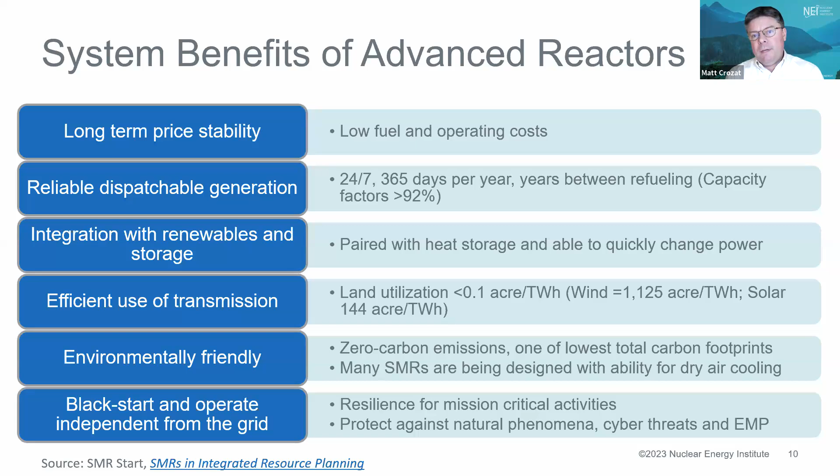What's behind this? Well, I'm not going to go through all the points on this slide, but what we really want to focus on are the second and third ones here, which is the ability to pair a 24/7, round-the-clock generation asset that is carbon-free alongside wind and solar that are being deployed at large scale. We continue to expect an increasing drive towards low carbon solutions, but nuclear works really well as a complement to provide steady power alongside intermittent resources that have been expanding widely and will continue to do so.

This is happening with the backdrop of a lot of political support across the aisle. By way of full disclosure, I'll point out I made these slides a number of weeks ago, and the politics have been evolving since. But the overall themes here from the Biden administration, Republican Congress, even the chairman of the Senate Energy Committee, have been very strong support for nuclear across all of these political constituencies. And this has actually driven to a manifestation in some pretty significant policy developments over the last 2 years that have really reshaped how nuclear could fit in the portfolio.

Going back to 2021, we had the bipartisan infrastructure law, the Infrastructure Investment and Jobs Act. This was passed on a bipartisan basis, as I said. It included 3 big policies for nuclear. One was funding to ensure that plants that were facing the economic pressures to close would have funding to continue operations. That funding has been central in seeing the decision to reverse the planned closure of Diablo Canyon in California, for example. We also saw funding for the demonstration of advanced nuclear technologies, which had been previously identified, but now actually have the money to go with the government cost share. And I'll get into more of that later.

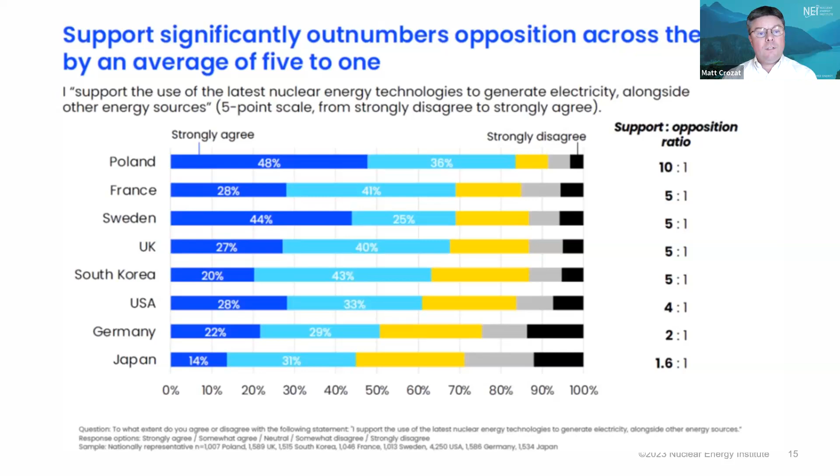First, what we begin to see is as we ask people on a 5-point scale how they look at nuclear, the answer is positively. I think in some cases surprisingly so. We begin to see, even in countries that have been more reticent towards nuclear in recent years, support, at least modestly so, for a continuing role of advanced nuclear. And in some cases, we've seen extremely strong support for nuclear. If we take that same kind of question and push people off of a 5-point scale and simply ask them, should nuclear be part of the future or not? The answer is yes. We see strong support for nuclear as a policy choice for moving forward technologically.

Even when we begin to narrow the question for those who claim an affiliation with an environmental organization, we see support for nuclear across countries. Moving past the point, especially in the United States and Europe, where nuclear was being seen as the primary focus for environmental activism, that's been softening for a number of years now. And we're really seeing it in the data. I'll come back to that too.

One of the places we have seen a gender gap is around support for nuclear. Upon further investigation, though, what we're finding is this gender difference in how nuclear is being perceived is less about a rejection of the technology and more about an uncertainty. There is an opportunity for engagement and conversation to bridge this previously established gap that we have seen. Some of the data that is not included here shows that just creating a conversation around some of the attributes of nuclear goes a long way, even in just the brief context of an interview, of moving some of these attitudes, which is something that's encouraging as well.

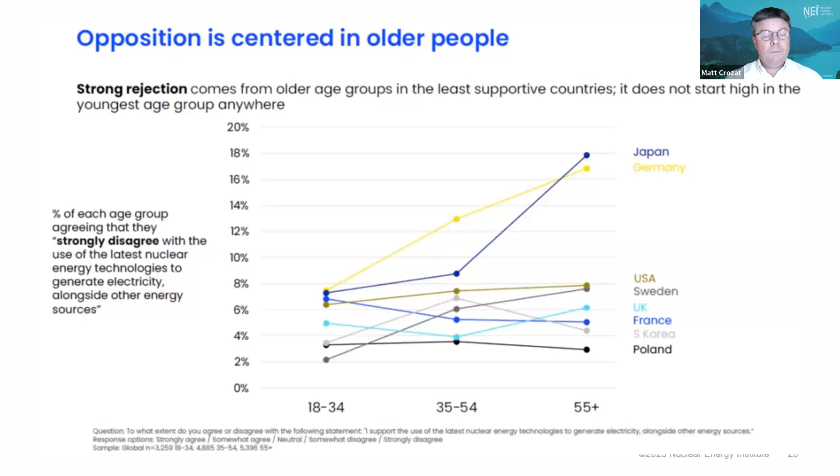But to put it clearly, climate change is a bigger concern than anti-nuclear activism assumed 30 or 40 years ago. And we are seeing this in not just the survey data, but in the kinds of conversations that we're having and the sort of political support that we're seeing as well. A very interesting development that happened, to my mind, fairly quickly over the last 5 years.

But part of what's been driving this conversation as well is that we've had the chance to open up what nuclear means. We no longer have to think about nuclear as the same specific projects that led to anti-nuclear activism in the 70s and 80s. There are new ideas, new possibilities, new technologies that have really given an opportunity to revisit some of the questions around what nuclear can mean and how to think about them more holistically.

The advanced designs have gone a long way towards opening this conversation. So let me talk a little bit about those. I want to begin by acknowledging that in the United States, we are seeing the first Generation 3, as we call it, nuclear plant online. Unit 3 of Plant Vogtle in Georgia is operational. Unit 4 will follow within about 6 months.

This will provide enough carbon-free power to run about 1.5 million U.S. homes every year. It didn't go according to plan. It was a bit more of a journey than we expected, but the persistence that led to this completion has created the learning that will inform all of the technologies to follow.

All right, so where do we stand today? We're looking at something on the order of 6 technologies being developed. It's not the same degree of maturity. I'll talk a little bit about that in a moment. We're seeing the Department of Energy with significant funding to support the development and commercialization of some of these designs. Utilities are including these technologies in their long-term plans and in how they're talking to their state regulators about what they need to be building.

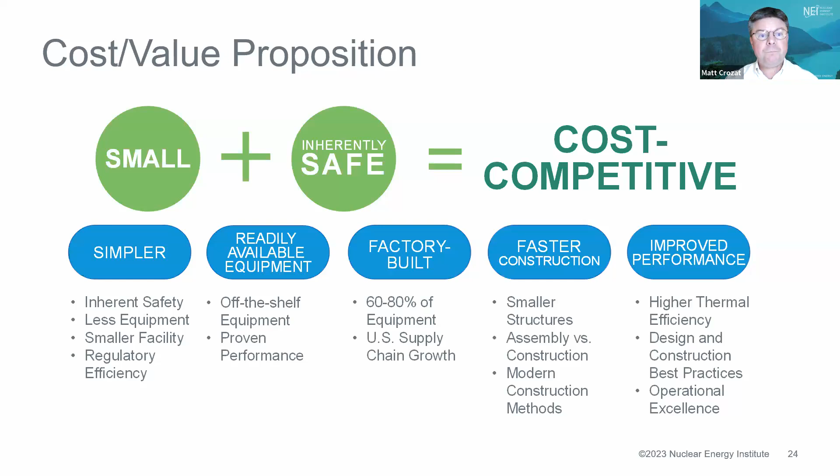We are seeing what I think for the first time I would call an entrepreneurial nuclear development system, where you have companies being founded out of small founders that are going for venture capital funding and eventually IPOs to develop the technology, while also doing it in a way that's not beholden to the larger bureaucratic infrastructures that we've seen in the past.

Not all of these companies will be successful, we know that, but it has opened up the possibility of the kinds of ideas and the kind of talent coming into the industry that we'd never seen before. This is unique to the United States as well. We haven't seen this scale of entrepreneurism in nuclear development in any other country either.

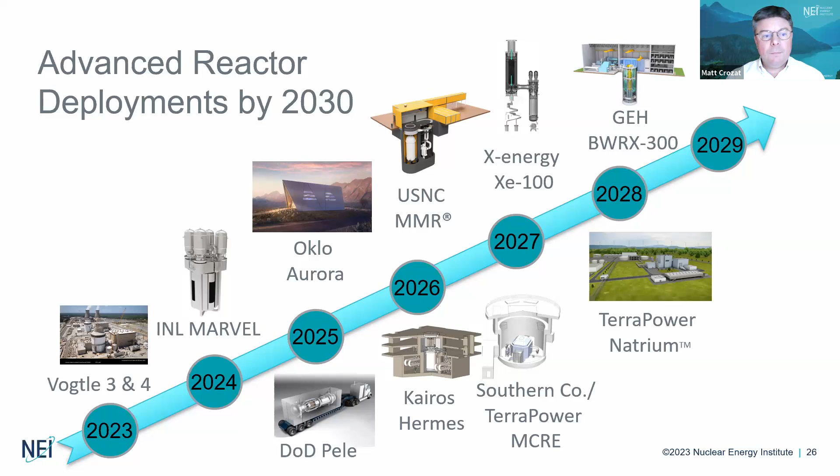So what are we looking at in terms of time horizon? We have a series of designs that are working to various stages of demonstration, either in concert with the government or just on private schedules alone. This will be a real opportunity to see actual dirt moved, concrete poured, and power produced this decade for a number of designs. And I'll talk about some of these in a little more detail.

As we look towards other coolants, many of which have been tested in the past, but never commercialized at the scale we're talking about now, you open up the possibilities for what these technologies can do. You can either have designs that have less need for high pressure containments, which are very expensive, or can operate at higher temperatures, which improve thermodynamic efficiency and also open up different business lines.

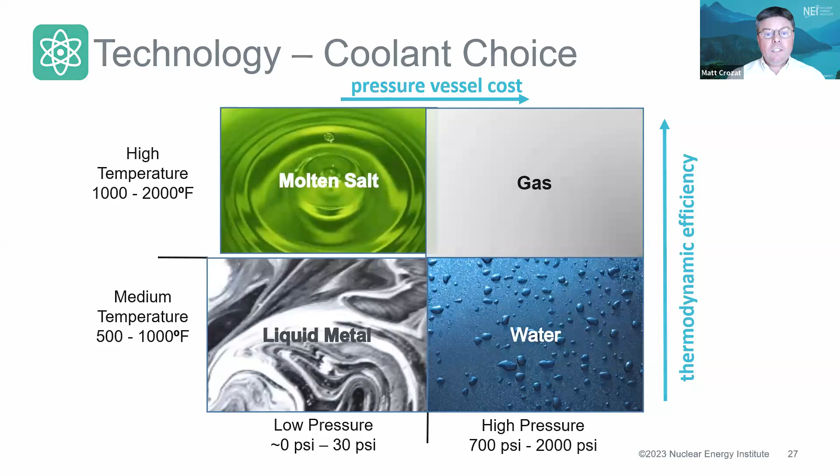As I look at some of those companies from before and put them on this chart, we're seeing a range of technologies and designs coming to the marketplace that are just much more vast than we'd seen prior to this development. Until recently, if you looked at deploying new nuclear energy in the United States, everything was in the upper left-hand corner. It was big and it was water-cooled. Now we're seeing much broader range in terms of the sizes of the units and also the technologies that are being deployed as well.

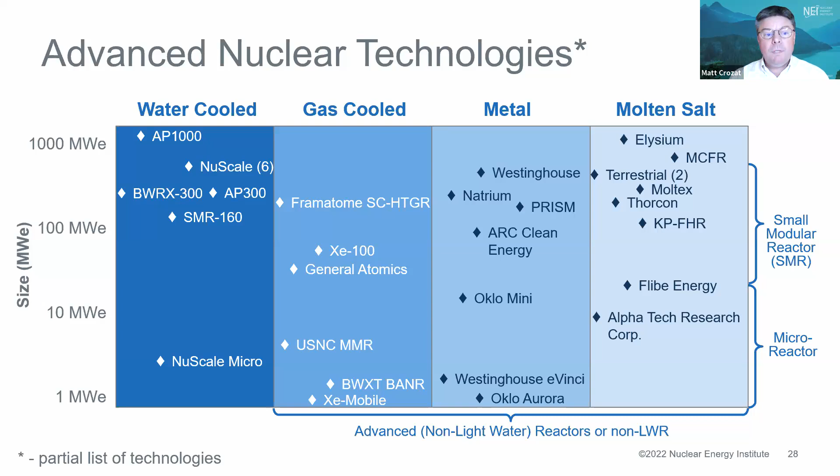So let me give you an example of what one of the more straightforward extensions looks like, and that's GE Hitachi. They have a 300 megawatt boiling water reactor. It builds heavily upon a design they developed the better part of a decade ago, which was much larger, but it relied a lot on passive systems to ensure safety. So a lot of natural circulation involved in the design. That has all gone through the approval of the Nuclear Regulatory Commission to establish the safety of these concepts. They have much longer periods for ability to withstand challenging operations without any operator actions.

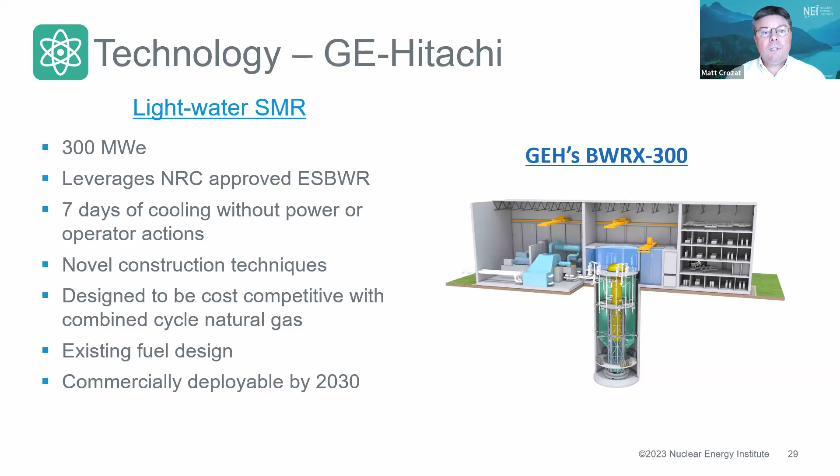Interestingly, they're also trying to lean heavily upon new construction techniques to the nuclear industry, techniques that we've seen in things like drilling technologies that have been previously used in, say, the oil and gas sector. They also build upon fuel that we have a great deal of experience with, so that's well understood and well established. We're seeing interest in this technology from a number of U.S. utilities, but most notably the Canadians in particular have committed to deploying this in Ontario this decade. So very much a technology that we're excited about.

Another possibility along these lines in the light water SMR is NuScale. Their design is a different concept. They focus on what they call a power module, 77 megawatts, and the ability to put multiples together in one facility. This has been through the NRC technical review, so this has been approved. It also, in so doing, has been granted the

regulatory change that rather than needing to create a 10-mile radius, in the case of an upset condition, to manage the population, the expectation here is that this plant would never have a radiological release that would ever leave the site boundary. In other words, I don't need to worry about how this interacts with the local population. Nothing's ever going to get that far. And the NRC's approved that concept based upon these smaller designs. It also uses existing fuel. I'll come back to this at the end as well.

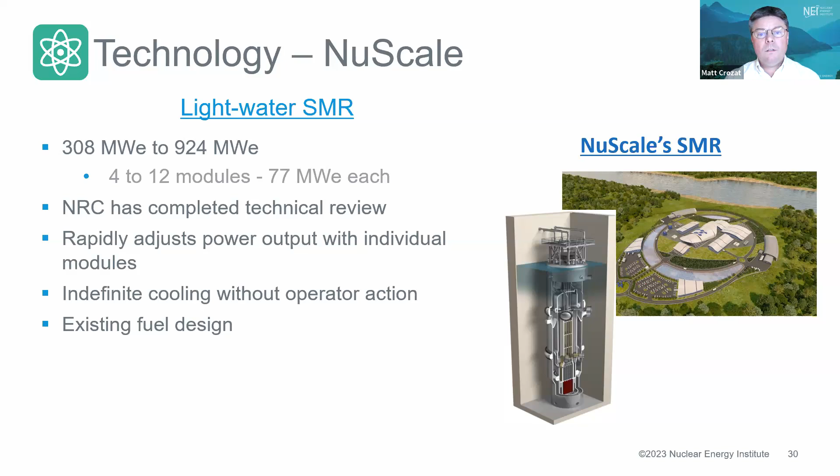As we get a little more afield from the current range of technologies, I want to point to TerraPower, which is developing what they're calling the Natrium system. This is a sodium-cooled reactor that has this very interesting characteristic that is designed for the reactor to operate at a constant power output, 350 megawatts, 345. But it's linked to a thermal storage capability that can ramp as high as 500 megawatts.

So if you're putting this in an area where you have renewable deployment nearby, it has the ability to store its extra power when I have the solar output or wind output and save it for when that's not available, at least at that point. This is a company that's been backed by Bill Gates and has seen funding from the Department of Energy as part of its cost share.

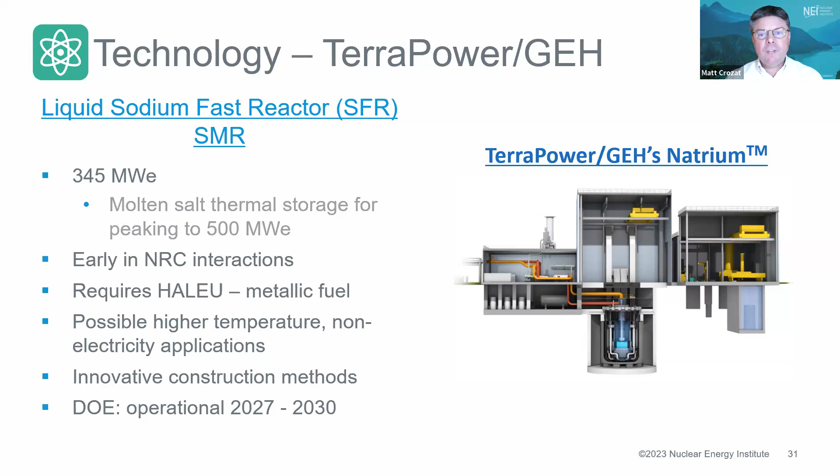It is being developed in Wyoming to replace a coal plant that is going out of business, and the overall response from the communities that were not selected has been to plead for additional units. So they're exploring developing more of these in Wyoming to replace coal facilities in the state. So that's kind of a flavor of some of the technologies. I have a couple more that I'll come to as well, but I want to talk a little bit about regulation and applications and then open for questions.

So one of the places to start when we think about safety regulation for nuclear energy in the United States is we're starting from an incredibly strong position. The nuclear fleet of reactors is among the highest in occupational safety anywhere across the economy. We have an independent regulator that is largely paid for by the industry itself, but they are independent and overseen by Congress. And so we spend a lot of time interfacing with them to ensure that the kinds of things they're working on are the ones that actually improve safety and not just create administrative burden.

As we look towards these advanced technologies, this opens up additional possibilities that as we incorporate more and more of these safety features, like natural circulation, it should make the case for establishing safety easier. Right now we're still working through the first units, and there's been a lot of back and forth. It's been a lot more time consuming than we'd like. But the hope is that once we've worked through these issues, we'll have a strong basis of precedent that we can refer to as we deploy subsequent units that can more easily incorporate what we understand from the science and how it's already been established in the technological basis for regulation.

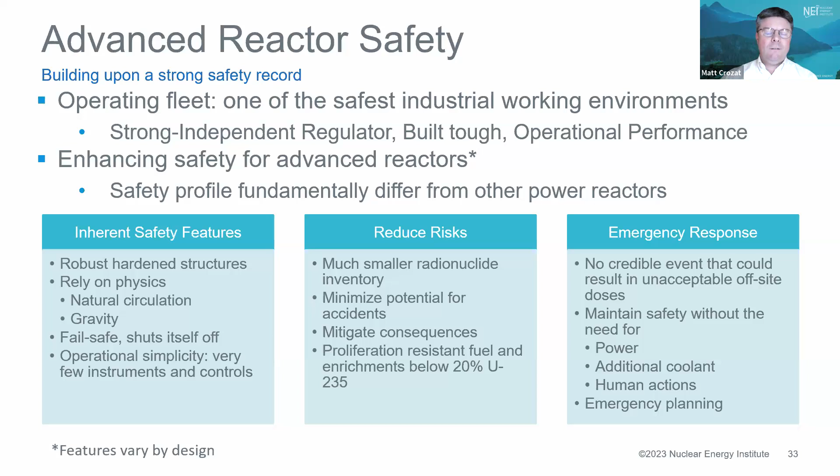So we expect the first movers to have more challenges that should then be paid off in the longer term by having a more well-established basis for more efficient approvals going forward. That's the theory of the case. We have a lot of things that we focus on to try to ensure that we're working towards that goal. I'm not going to go through all of these, just to point out that we have the basis right now to license the plants that we are designing today.

What we're working towards is ensuring that we can streamline that in a way that safety is being preserved, and we don't have to do so in a way that is administratively so cumbersome that the 20th unit gets all the same questions as the first unit, in spite of the fact we answered all those already. So that's kind of the regulatory framework. We can go into more of this if we like.

I want to talk about applications, though, because one of the things that has been really fascinating in the last 4 years is we've seen that as we've expanded the portfolio of technologies that are available, we've also begun expanding the kinds of companies and industries that are interested in nuclear for their own opportunities.

Some of this has to do with the sizing alone. Others have to do with the temperatures as well. So let's talk about some of the sizing. We have reactors that are being developed for as small as 1 megawatt. But for a comparison, Vogtle 3 is 1,100.

What we're seeing is a great deal of interest around being able to use these smaller units at more physically removed locations, both in terms of the geography, but also for applications that might want to, say, remove themselves from integration with the broader bulk grid.

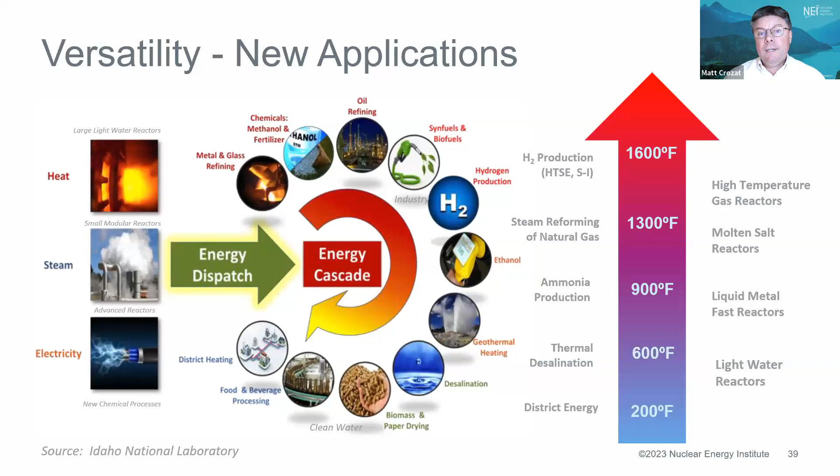We're having a lot of conversations with the oil and gas sector that didn't make a lot of technical sense before, because I have concepts now such as the X-Energy Xe-100, which is not 100 megawatts. I've never understood why they call it 100. Different question, though.

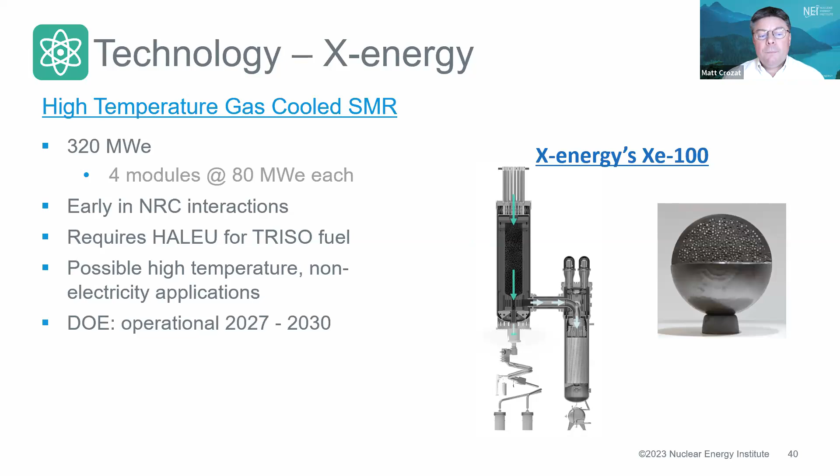What is interesting, though, is by using a fuel that's been well researched and developed by the Department of Energy over a number of years, but not commercially deployed at the scale, it can operate at higher temperatures using helium as a coolant instead of the current design that we've seen with water. With these higher temperature applications, you can think more broadly about industrial uses.

That's exactly what's happening as Dow has come on as a major partner. They're looking to deploy this technology at a petrochemical facility in Southeast Texas called Seadrift, with the intention of replacing what is currently fossil fuel going in for process heat, instead using just the heat application from these technologies to operate this facility. Again, broaden the perspective.

So, to sort of begin to wrap up and open for questions. As we've looked at these sizes that have changed how we look at what's possible, and then the markets that we're seeing as well, one of the places I didn't talk to yet, but I'll close on, is we've seen a lot of direct engagement around the use of nuclear as part of a solution for large data operations.

We have currently at one of our nuclear sites today a data center that is operating behind the fence line, drawing power directly from the nuclear units for a carbon-free solution there. We're also seeing conversations with companies that are looking at these new technologies and the extent to which they might fit as part of a solution. NuScale, I mentioned earlier, is exploring the possibility of a large set of deployments for data centers, I think, in the Ohio geography. We'll see how that plays out.

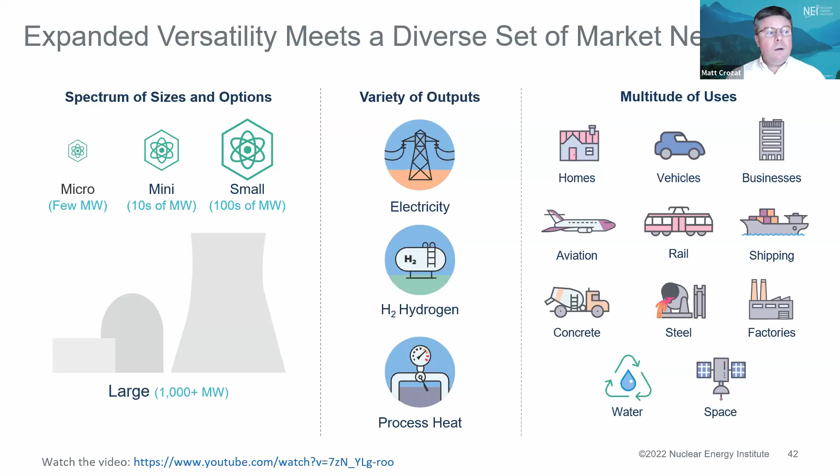But with that, let me stop there, open up to some questions, and have a bit of an opportunity for some dialogue here. Jen, should I turn to you?

Appreciate that, Matt, and thanks for giving us the breakdown on where we're at in the market currently and kind of how we got here. I think for the data center market, one of the primary questions most folks have, and there might not be a very easy and straightforward answer, is when can this industry start planning around SMRs as being a power solution for sites that we're developing?

We see that initial deployments are projected to come out in 2027, 2028, and those seem to be proof of concept, test cases, partnerships. But in terms of commercially available power, when should we be thinking about nuclear small modular reactors, advanced reactors as a solution?

So I think when I look at the projects that are coming on towards the end of the decade, those are going to be, in many cases, full-scale, commercially operational units. So what you're seeing there is going to be what the next ones look like, which I think opens the possibility for some pretty quick, fast follower options.